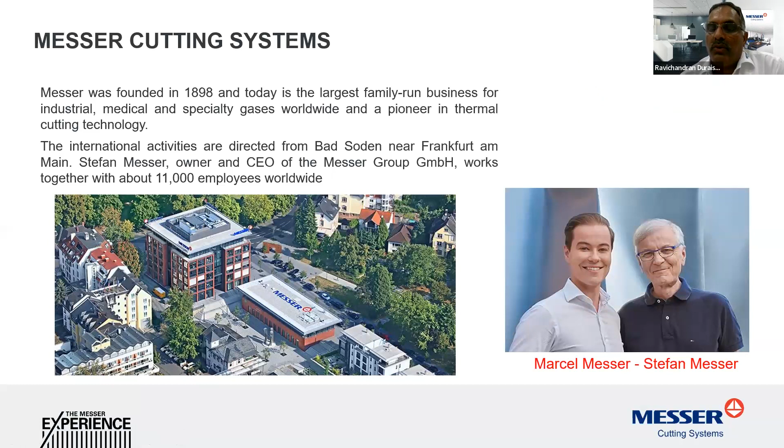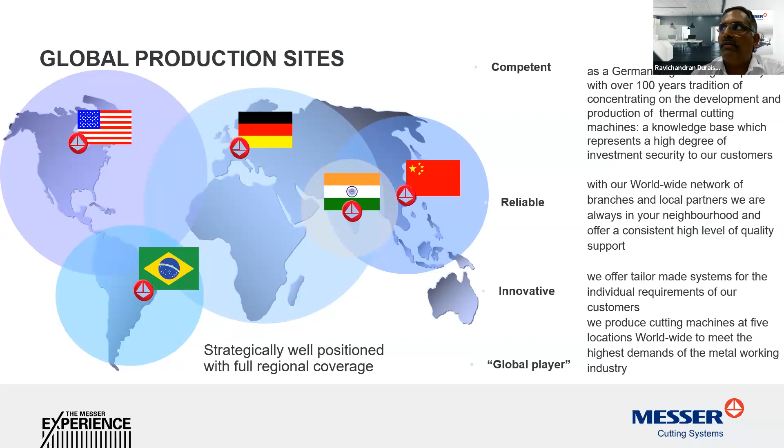Going to laser, let me introduce myself. I am the product manager for machines in Messer Cutting Systems. This is a 125-year-old company, situated in 5 places across the globe, each taking care of a part of the globe. India is one entity where we take care of all the SAARC countries, including India, Middle East, and part of Northern Africa. We have offices and service facilities across the globe. This is a global company, one among the pioneers in plate cutting, especially in plasma and oxy-fuel. Now we are also putting our mark into the laser cutting scenario. This is our factory at Coimbatore, a nice place. I am very proud of my city as well as the place where I work.

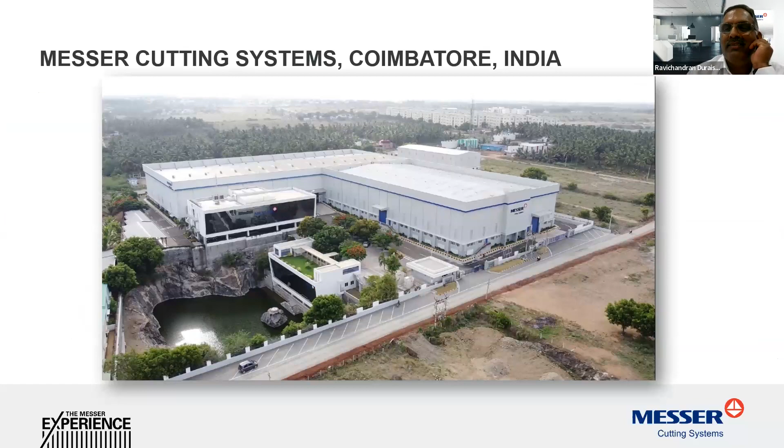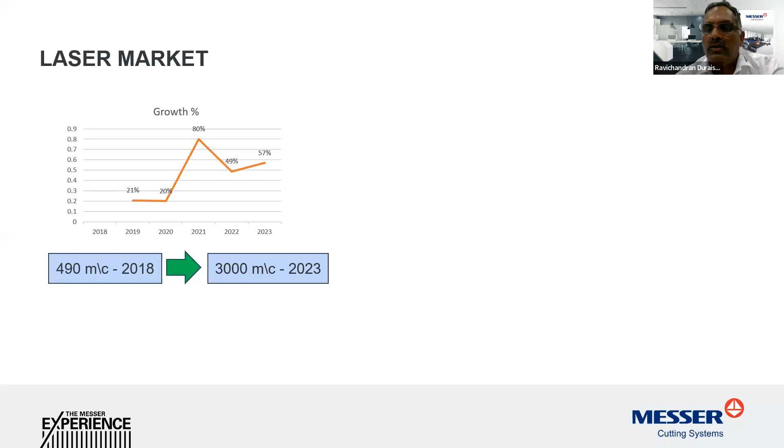Now, the laser market is growing like leaps and bounds over the past 4-5 years. I am showing you the growth trend: it is from 20% in 2019, grown to 50% over the years. The growth itself is tremendous; I'm showing only the percentage, but it's like 490 machines in 2018 to 3,000 machines this year. So that's the growth we are looking at.

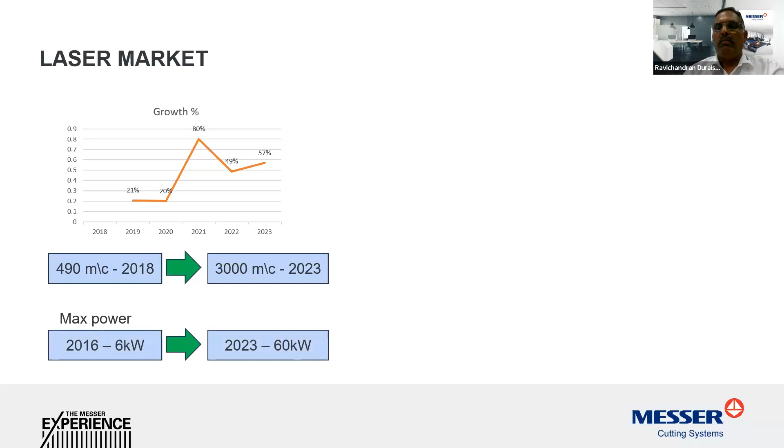Power-wise, we never heard of 10 kilowatt or 12 kilowatt back in 2016, but now commercially 60 kilowatt is available for cutting. Even people are showing 80 kilowatt and 100 kilowatt, being tested by application guys, but not yet out in the market. Commercially, 60 kilowatt is available in the market. All this is because of ease of integration, low maintenance, low investment, low operating cost, and higher efficiency, all summing up to higher productivity.

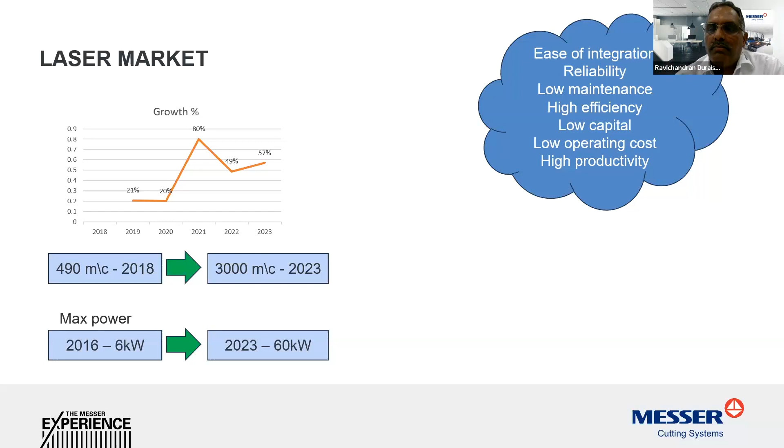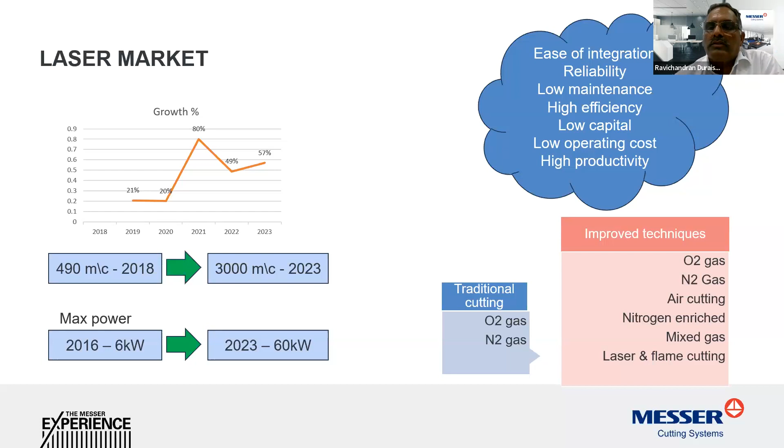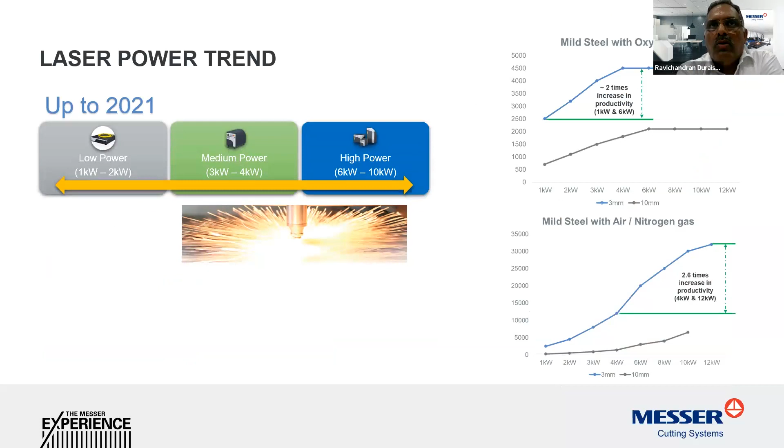That's been aiding the laser market to grow, even in the higher power segment. Also, coming out of traditional O2-N2 cutting, new technologies like air cutting, nitrogen-enriched cutting, mixed gas cutting, and now the latest trend of laser and flame cutting are coming up so you can cut thicker material. It's not just that other processes can do it, but laser can also do it. This also increases cutting speed and productivity. When you go for higher power, you can have more productivity, 2 times, 3 times.

What was perceived as low power, mid power, high power earlier, the whole definition of laser power is changing year on year. Now we don't have low power; we have low and medium power, where low is literally going off as time goes on, and high power and ultra high power, where ultra high power goes up to say 50 kilowatt or 60 kilowatt.

So that's how the trend is. All this is possible because of high reliability of the laser sources which are being made, and availability of the cutting head, and people ready to

experiment on the field wherein they get high productivity in terms of higher plate thickness cutting, and various things, in fact beveling also. Of late, beveling in laser is becoming a trend wherein, if you are thinking of post-processing or taking it out and doing beveling elsewhere, now you can do it on the machine itself with one straight operation.

So all this is possible only because of high power laser cutting. The trend is like every year high power is increasing by around 10 to 15% year on year, the machines which are coming in.

And this market, I would say, is year on year substantially changing. It's not like you have a benchmark this year and it will be there for another couple of years to follow. It's not like that. What benchmark was here last year, like it was 12 kilowatt, it's gone off - this year it's 20 or 30 kilowatt. Next year it'll be 50 or 60 kilowatt.

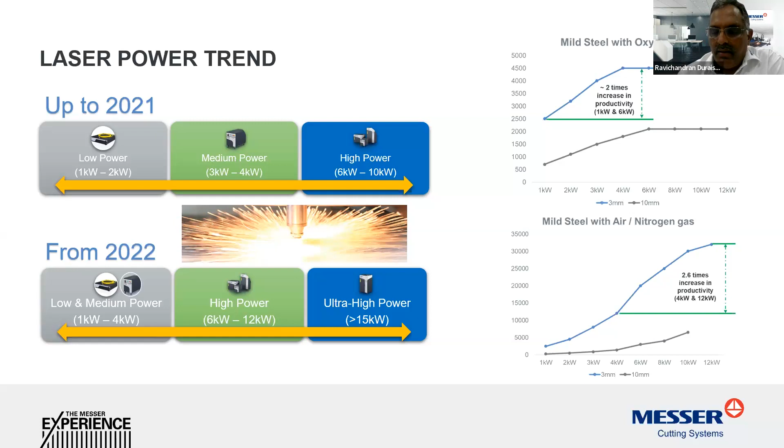Earlier we had this myth that lasers were only up to 25 for cutting mild steel or stainless steel, with plasma eating up from say up to 150, 120. Then other than that only oxyfuel is possible.

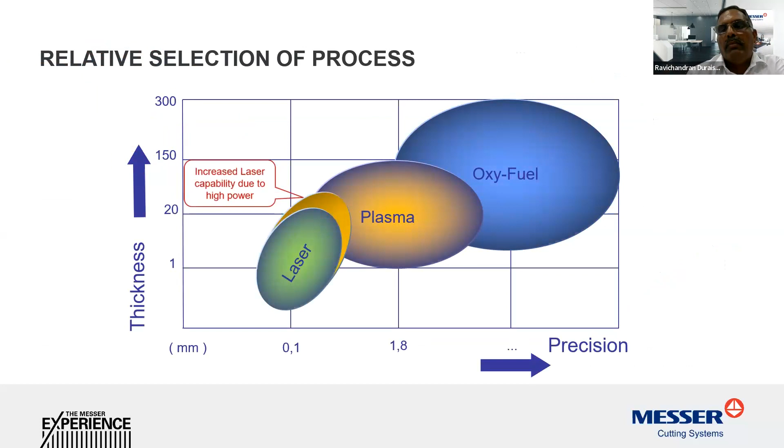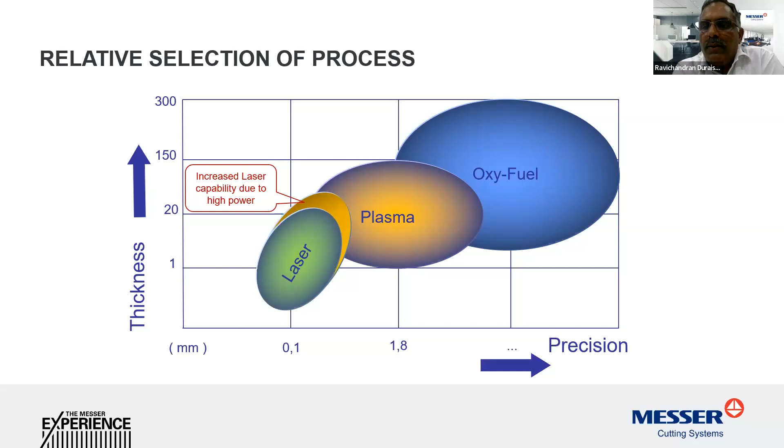Now the capability of the laser is increasing up to 50 and in some cases even 100 thick plates are also being cut, as studies on. So I can see people cutting 100 thick plates also, but it's not right now practically available on the commercial side, but still people are able to do it.

So at Messer, we have a whole range of products which can cater from medium power and high power, and also up to high ultra power, where we can have up to 20 kilowatt, and we are also experimenting with higher powers.

So this is to tell people that high power is not shying away. Earlier it was like 2 kilowatt or 1.5 kilowatt people were using for cutting. So now when you use a higher power, you actually reduce your cost of cutting.

It's not just that laser entity prices are coming down, so the capital investment is also coming down, and your productivity is increasing, efficiency is increasing. And when you use a high power, you spend less time in cutting plates. You also end up saving costs of gases and all the intangible costs which go with that. So the market is towards high power cutting.

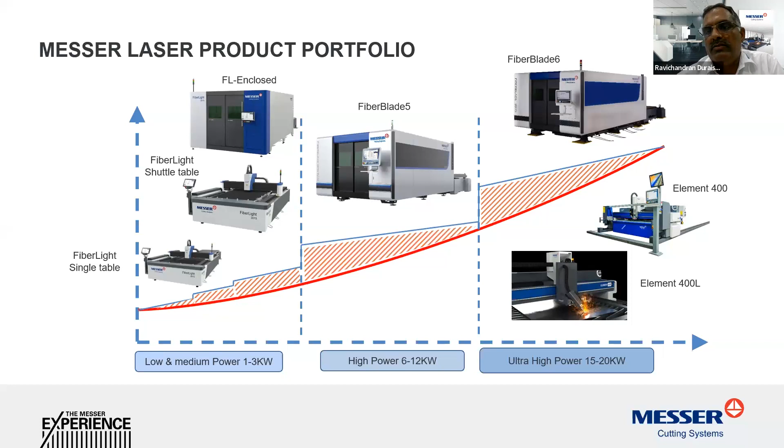This is one big thing which I want to say loud and clear at this moment. So if you see with this advancement of cutting, how further we can improve is by automizing our process.

Why automizing processes? Everywhere we have lean manufacturing. Our processes are being optimized, and we don't make high volumes - we actually shift based on the demand. So we have a very lean quantity in manufacturing also.

So we have to shift from one batch to the other, and we now have highly productive machines - like I said, high power, and also the machines are more highly productive. So if you have got to reap the benefit, you have to automate your process as well as feeding the machines or handling your raw material also.

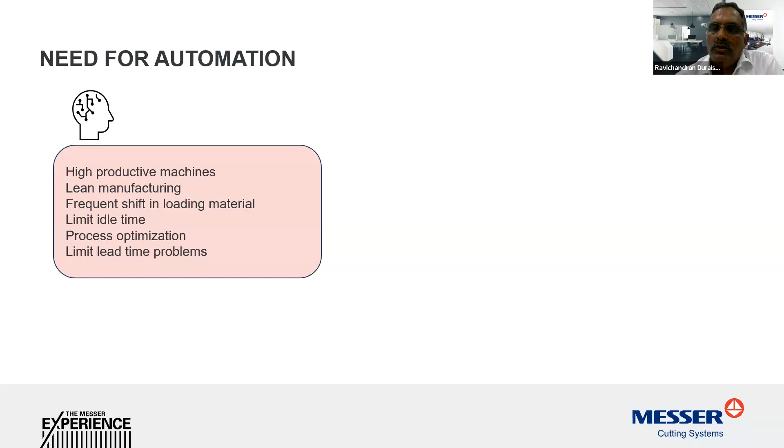So two areas where we can automate are automation in material handling, and automation process digitization of the process, which will help us to schedule, plan, schedule, and then follow up on the process and have the inventory in your system automatically. That's what we call digitization. And automation is handling, storing material, and then loading it to the machine and taking out the cut parts by sorting.

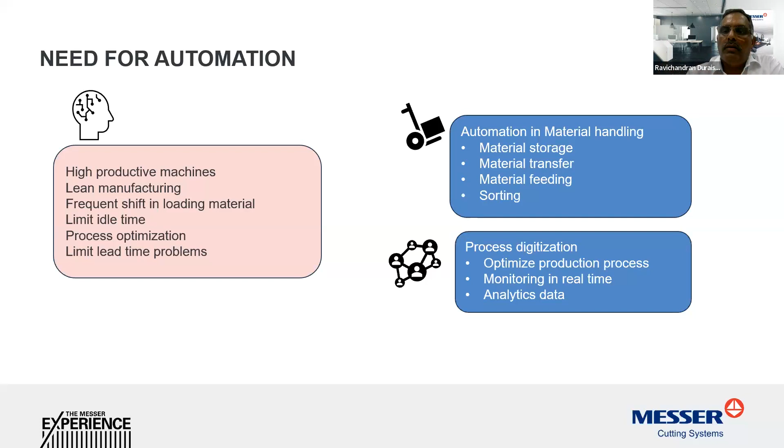So all these things will be more helpful with the high productive machines which are coming in. So just to see an overview, we normally have a storage yard, then a cutting area where the material is moved, and then loaded onto the machine.

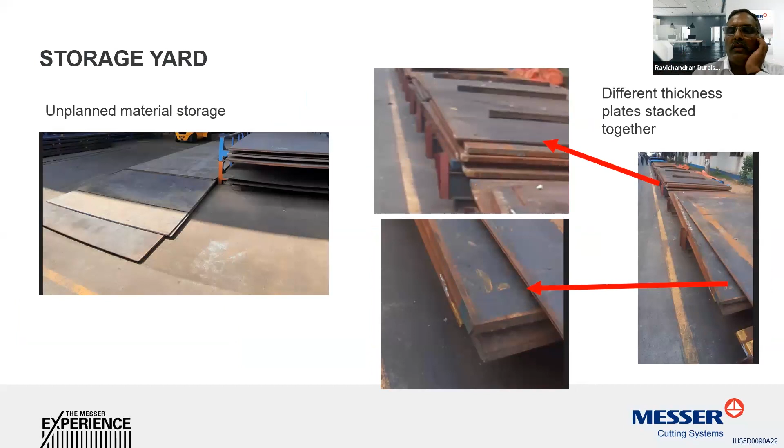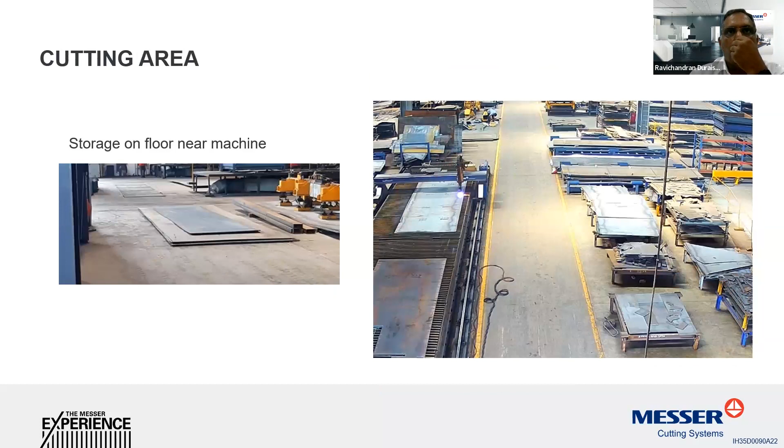The thing is you will have material placed in a haphazard manner on the floor, different thickness or different sizes stacked one above the other. This leads to losing manpower searching for material. The material takes up more than twice or thrice the area where the machine is, so space is also cost, right? We have to work out on that.

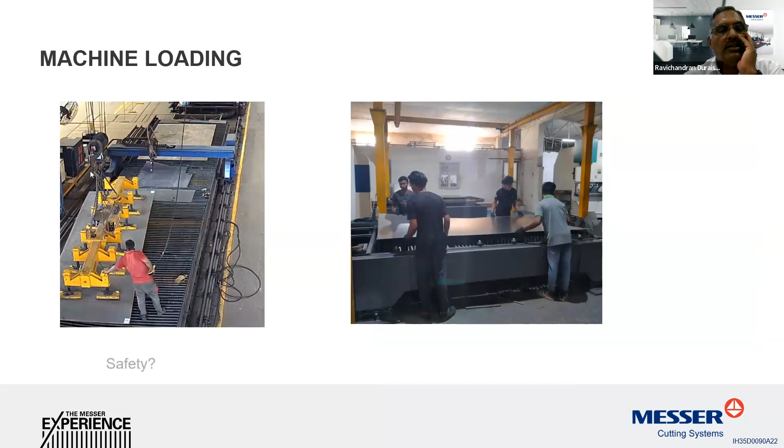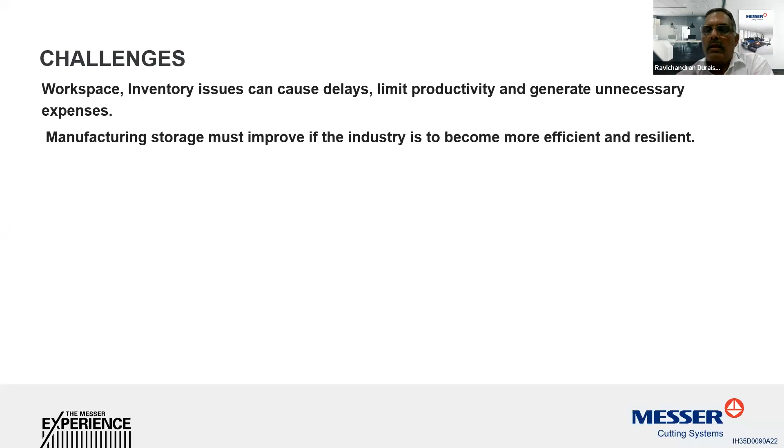And normally when you use a loading system using a crane, safety is compromised and we use excess manpower. So the challenges are space utilization goes up, inventory issues which can cause delays, and storage on the floor means you have to move material when you want to take one material out so you can get the material you need.

So all these are challenges. What it amounts to is inconsistent tracking, your visibility on the inventory goes down, your warehouse efficiency goes down, and you need more space as your business goes up.

So automation means you should have storage systems and handling systems. It's good if you have a high level of production, sorting the cut processed material and putting it into intermediate storage so it can be used further. This is becoming a need of the hour, and people are embracing it.

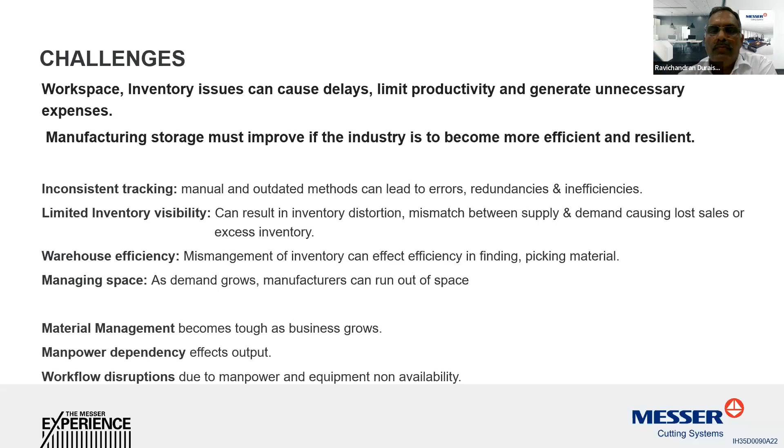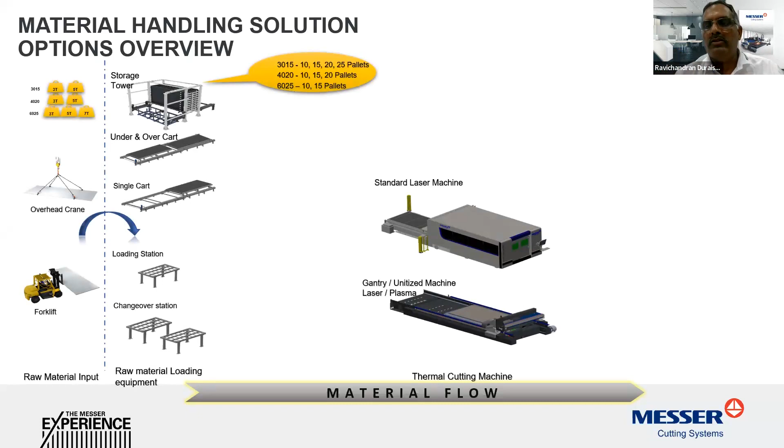In Messer, we have machines, and material can be loaded directly onto the plates, onto the machine - that's how we traditionally do it. But you can have storage in between where it is automatically stored so that your inventory is maintained, and a loader picks up the plate and loads it onto the machine.

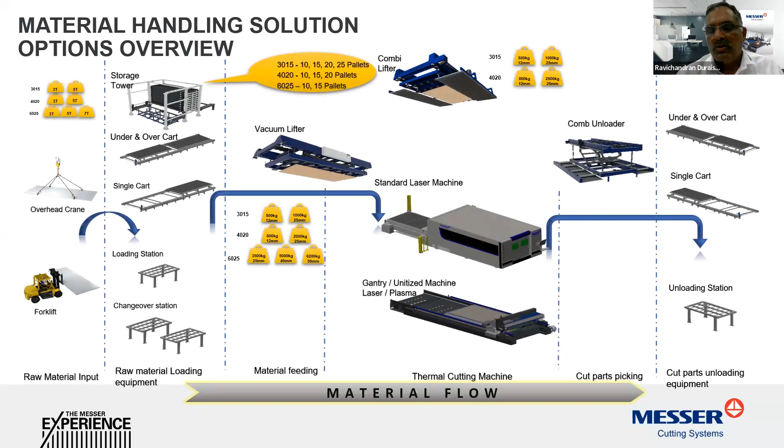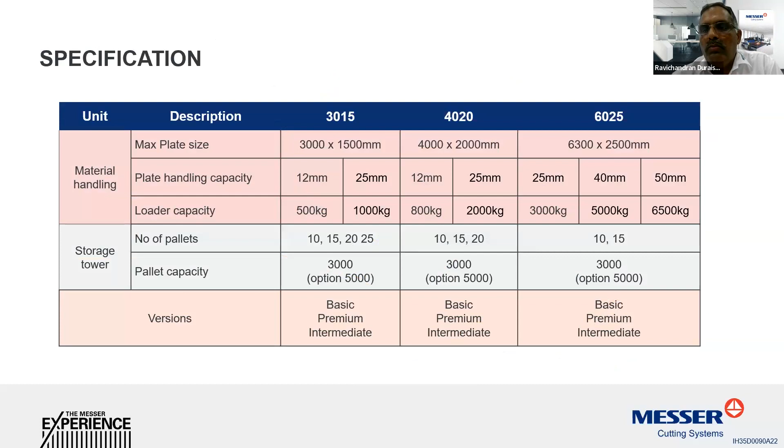After it's cut, the cut parts are taken out and put in another place where they can be sorted. Or both the loader and unloader can be combined into one. This is a typical way of showing how the system works, and we can handle up to 5 tons in one go. That's how material handling systems work.

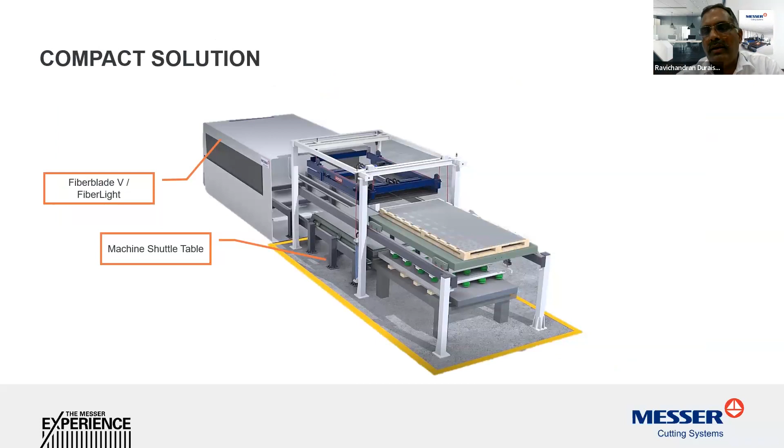We also have a compact system where if you have less space around the machine, you can have a pallet from which the plate is automatically loaded. I don't want to run the videos now so we don't take more time, but if somebody is interested, they can ping us and we can show them.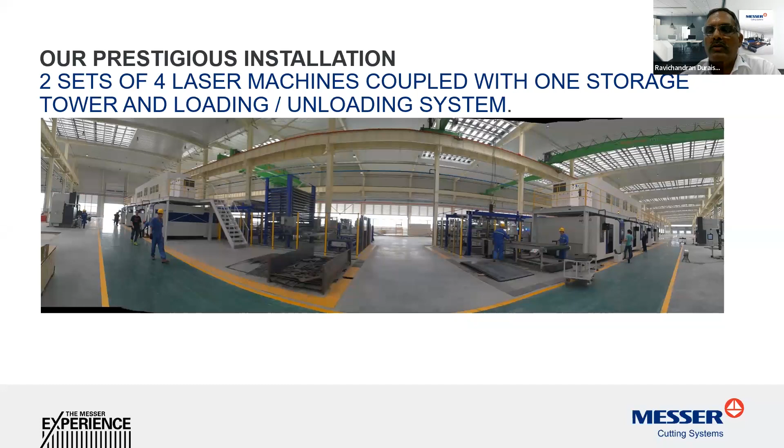Then on digitization of the process, you have order management - any industry processing, cutting industry or manufacturing industry, will follow this process. You have a work order, then preparation of the work, then planning, then you schedule on the machine.

And then there will be analysis, like how much you cut, how much the inventory parts come into the inventory. All those things are done manually. So if you digitize it, there's a smooth flow of information. When you take information manually, there is always a tendency to miss some information or make manual errors, or the information is not time-bound effective - it can be collected for 1 hour, 1 day, or 2 days, before it is known to the planning person.

So if it is automated, then whatever happens in the shop floor is known immediately to the other people. So prior planning could be done, scheduling can be done properly.

Messer has got systems for that, wherein we have an ERP Connect where we take in the demand from the customers' ERP system, and with that they can produce sales quotes and have scheduling on the machine. We have the PDC where it takes back the information to the ERP system. So everything is automated without any manual intervention.

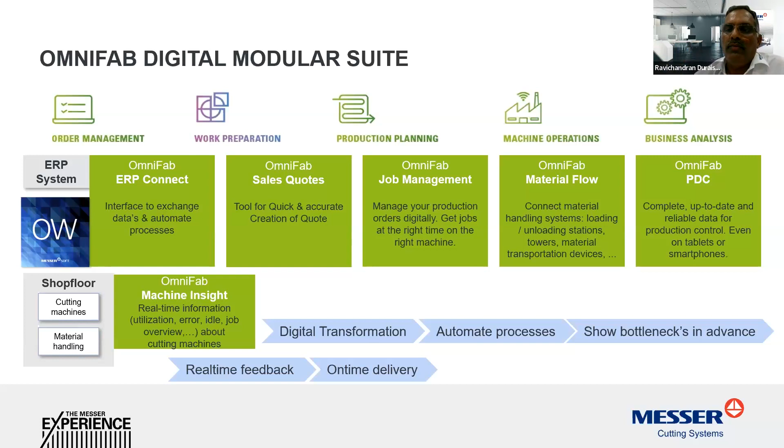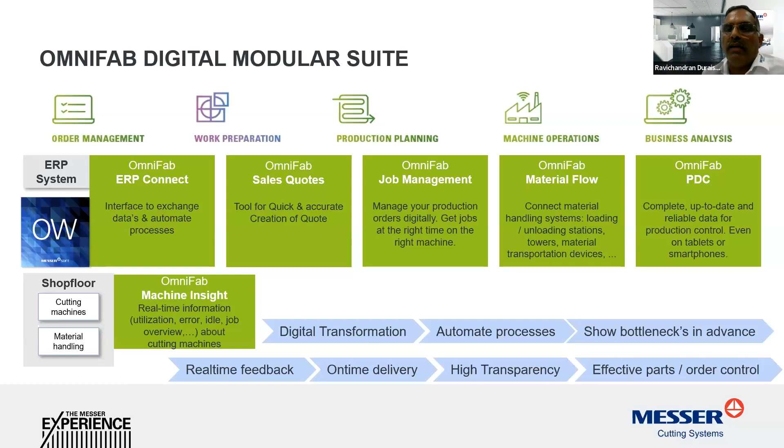So if that type of automation is available, it can improve the business further. It will show the bottlenecks in your process in advance so that you can plan properly, and give you real-time feedback that will ensure on-time delivery to your customers. That is more important, right? Delivery, on-time delivery is important. And that will bring high transparency into your process, which is the most needed thing of the hour. You will have effective parts and order control. This is the main benefit of having your process digitized.

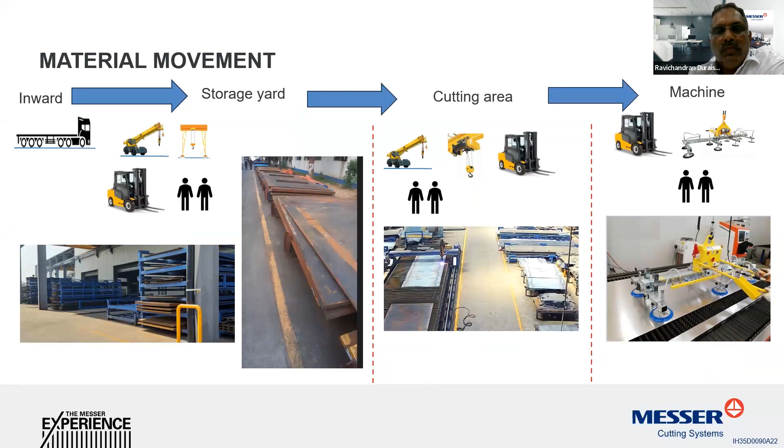So when you go for automation, I missed this. This is a general scenario in any industry: when you have material inward going to the storage yard, you involve at least a couple of people. Putting on the minimum requirement, each area needs at least two people, and sometimes three or four people to handle it. So when you go for automation, all these things go off.

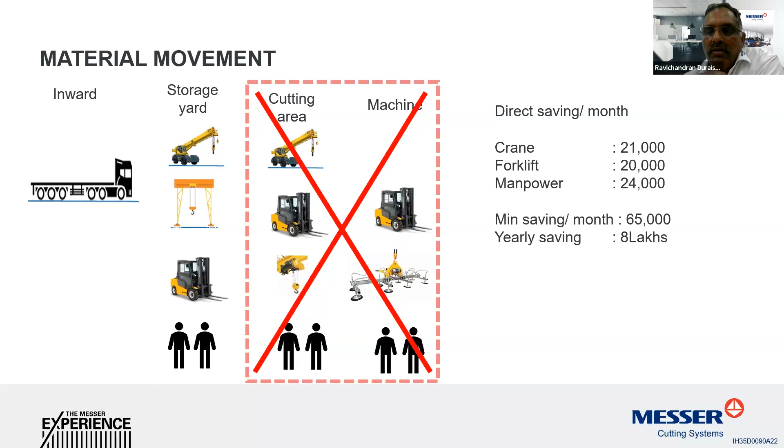So you are saving at least a minimum ballpark figure of 8 lakhs direct saving. And you are reducing your space, avoiding wastage in inventory, and increasing productivity by at least 20%. That's the minimum thing I am putting. And even if you are investing 1.2 crores, you can have the ROI in 3 years.

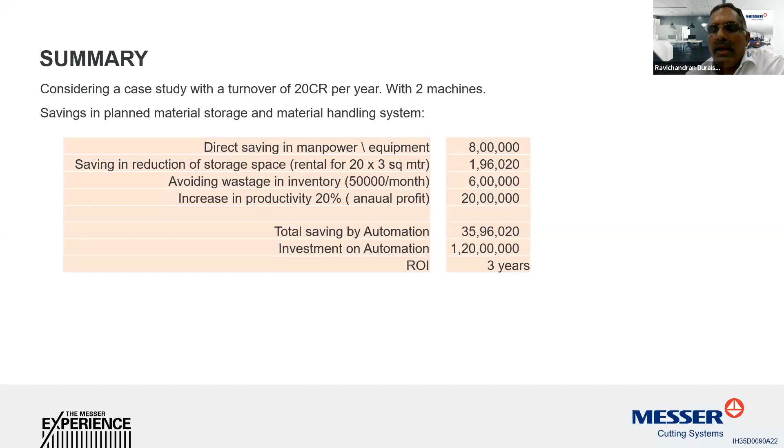So it's more than the direct saving. All intangible savings are more when you have an automation system, which you cannot take in when you see it, but when you actually calculate it, the intangible costs are too much, which can be saved. So it's more imperative that automation is going to be in the forefront for any organized shop floor.

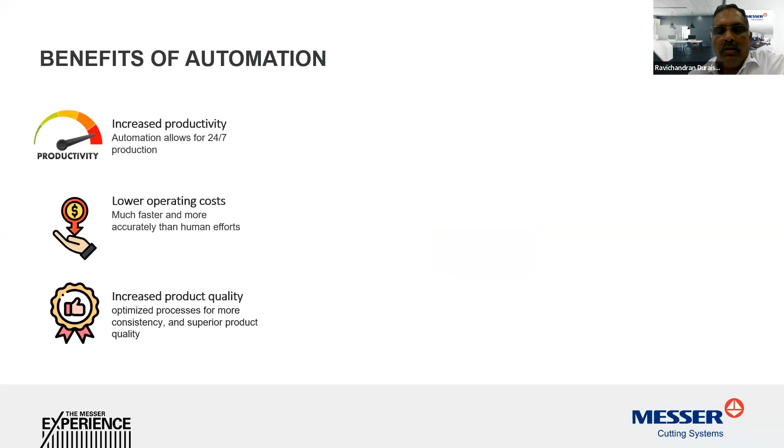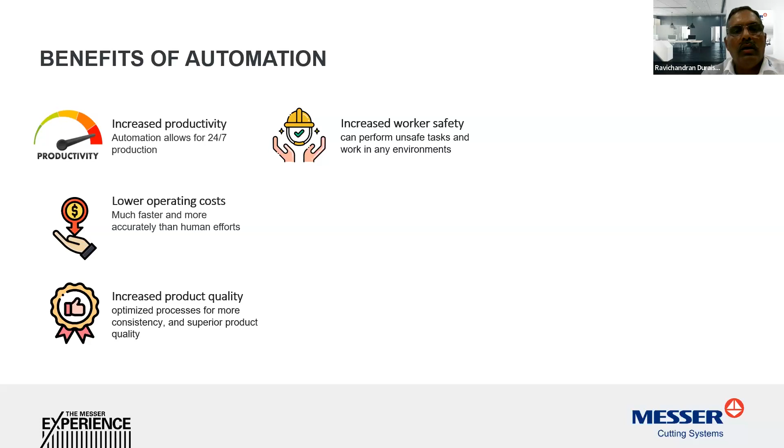And the benefits are, you can see increased productivity. It lowers operating costs because your process is streamlined, so your product quality indirectly goes up. And definitely, when machines are working, you have more safety for the workforce. All the hard work is done by the machines, so it's actually a better working environment.

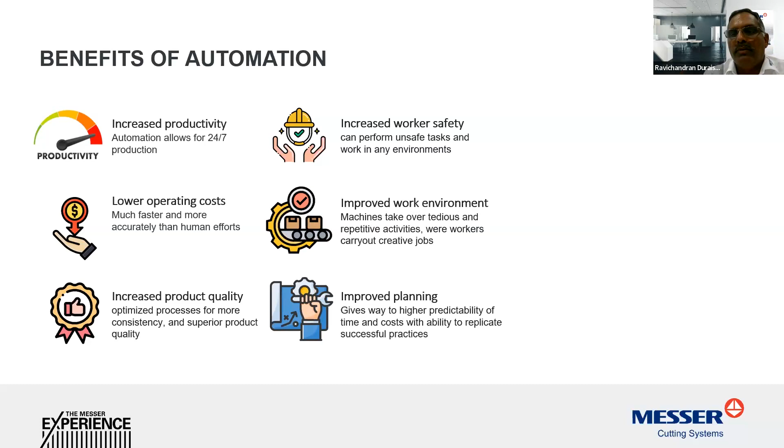And when you have all these systems, you are forced to plan better. It's like a hen and egg principle. When you have this, you have got to do this, so your process is streamlined. And you get more floor space, because your storage increases, your handling is more even, and your inventory is more controlled. The order of the day is we need to reduce our carbon footprint. So these are the benefits when you go for an automation system.

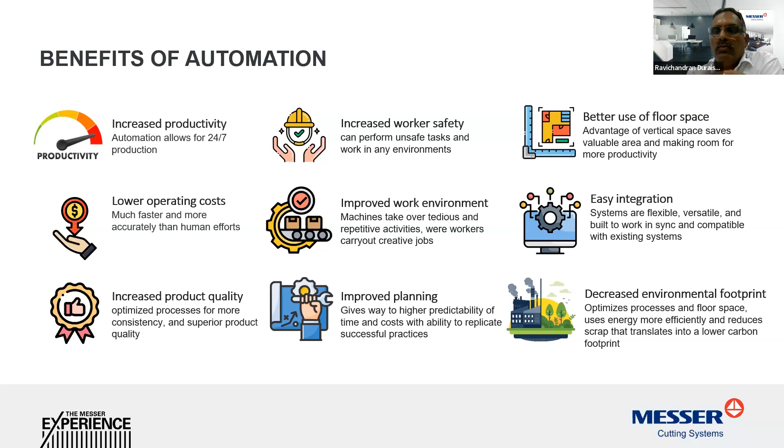And like I said before, the trend in laser cutting is towards high power cutting. High power cutting is not just to cut thick material. The high power can be used to cut the regular thickness you cut, but with higher speed, higher productivity, and higher quality.